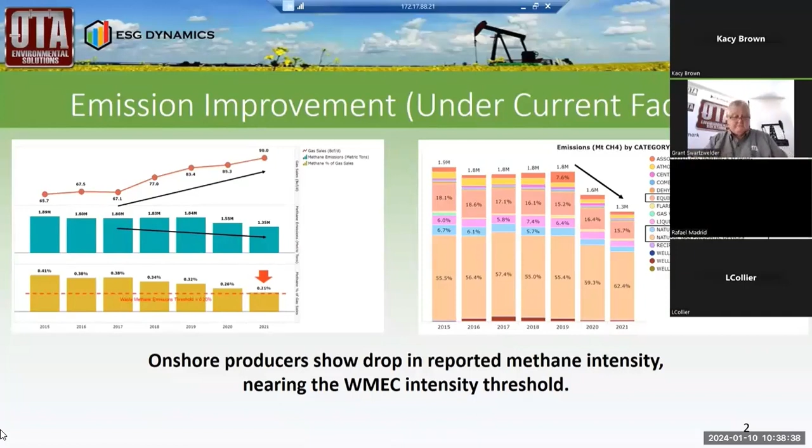So the frustrating thing is that as we're doing well, given the rules, now they're changing the rules. And the nice thing is they haven't even told everyone what the rules are. But all of this is going to increase the reporting numbers the industry has, and it's going to be significant. This is from the EIR, so it's fairly recognized data. They're talking about going up from that 2021 number by 130% with the changes they are proposing. So it's almost like moving the goal line.

What you see on the graph on the right is how 2021 is around 1.9 million. But because of each of these changes, from defining flare efficiency differently, worrying about combustion slip, leaks through factors, which is a huge part, and then super emitters, all of a sudden you see it jump up closer to 4 million, which is going to have several effects on the industry and on companies separately. On the left, you have the various factors or categories that are increasing. Super emitter is an interesting one, and we'll talk about all of these more later.

But this basically allows every proverbial Karen out there with a FLIR camera to go and identify what they believe are super emitters. There's really no rules as to what that is and who's qualified, but basically they're deputizing the world, primarily environmental advocacy groups, to go out and identify what they believe is a super emitter. That's going to increase the paperwork and the potential issues drastically.

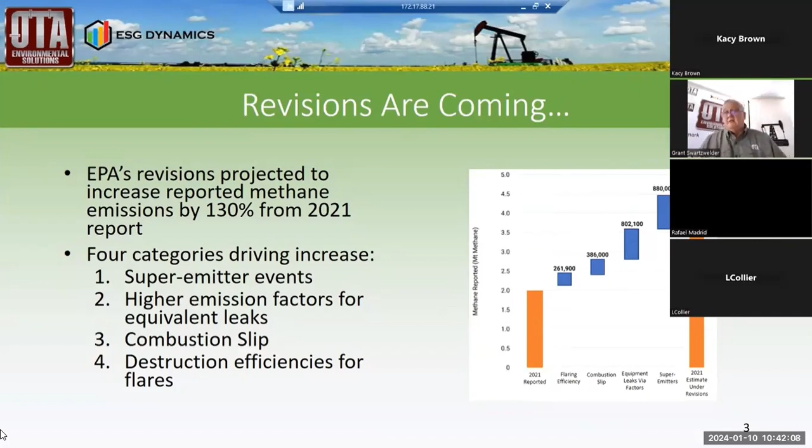And then the destruction efficiencies on flares. They've traditionally said that a flare has a 98% efficiency factor. They're talking about lowering that to 92%, which by definition creates more emissions and more challenges from a regulatory standpoint.

The whole start of this is with that subpart W, because again, if you're over that 25,000 tons, then you start kicking into a variety of factors. Right now, they've done the final rule, as you know, as of December 2nd, but there's still a lot of questions as to how that's going to really be implemented.

It's going to push it down to the states. The states come up with rules. It's come back up. So the one benefit of this whole thing is a lot of these things are not going to be really thrown at us for at least a year to 3 years. So it's kind of a question of how fast do you move, if you want to be a good steward but you don't really know what the rules are. And so if you're not careful, you're going to potentially go in the wrong direction because you won't know what the rules are.

This federal mandate under the Clean Air Act is a very sneaky thing that's been done. Up until this point, there's not been a lot of enforcement or audit compliance type capabilities, but doing it under the Clean Air Act creates the opportunity for enforcement, meaning fines, audits, penalties. And so they're really starting to put teeth into this. Again, it's not clear how all that's going to work. So I wouldn't jump out today and worry about it, but it is something that they're positioning for later on.

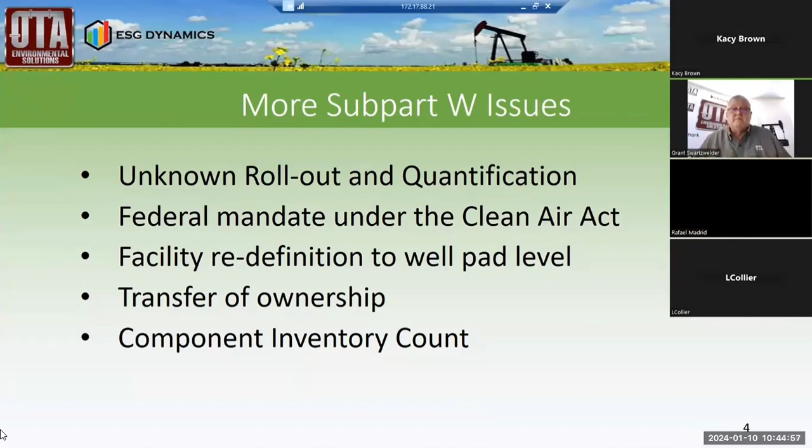So let's talk about the methane tax.

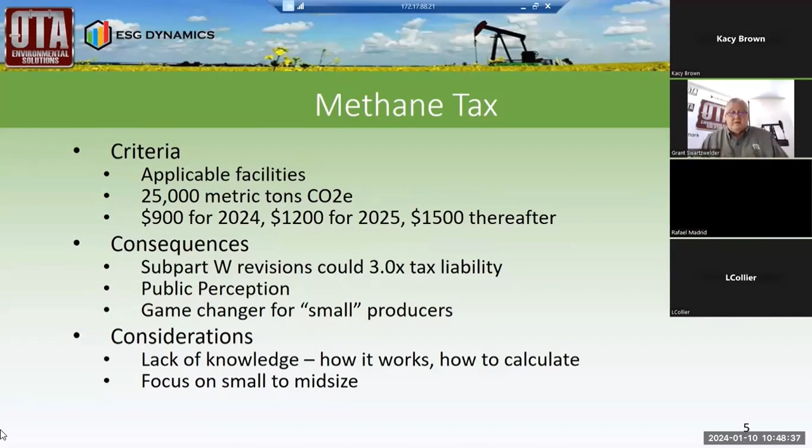So it puts the operator in a very tough position. You've got to report it, otherwise you get fined or audited. But if you report it, you have a chance of really stepping into the crosshairs of some of the emissions requirements. That is where really understanding the data that you're putting in and making sure it's accurate and defendable, but then also looking at how you can lower those numbers. That is really the key in components.

For example, we had a company we dealt with that had 5,000 components year after year after year. Well, it turned out they had never done an audit. They did an audit and reduced it to 3,000, which, as you can see, would have a huge effect on their subpart W. But that's only part of it, because once you look at those components, you have to also be able to say, do we really need them? Are they even working? As a best practice, first, you get a good inventory. Then you need to make sure that you actually are using them. If not, either put an X on them or take them out, so that if you get audited, you don't have those components to worry about to increase that numerator.

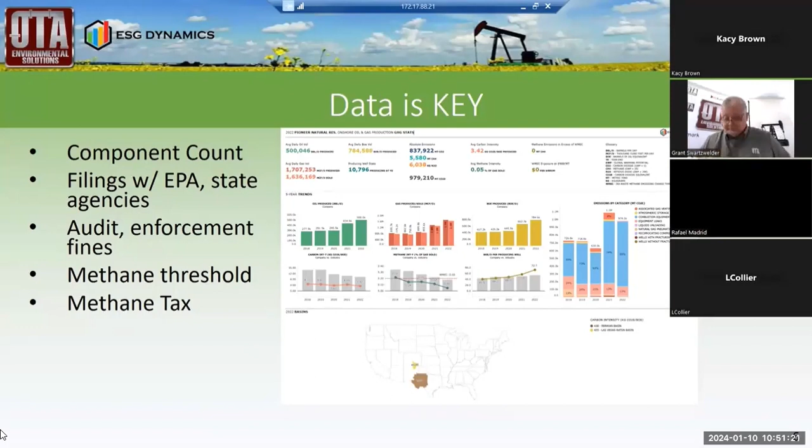So again, the bad news here is that it's really the low, marginal producers that are getting the main detriment of all of this regulation. And what they're pointing at is that 6% of the total production equals about 50% of emissions. Now, a lot of that, again, because of the numerical way they look at it, is because of the components and how they're calculating that. So I question whether that's really accurate, but that is how they calculated it.

If you're trying to change, say you're changing your pneumatic valves, actuators, and use instrument air, well, that could cost you from 10 to 30, $40,000, depending on the size of the facility. Well, depending on your production level, that might not be an economic benefit. So it really puts you in a sensitive position from a capital standpoint, from an LOE standpoint. So looking at what your priorities are on how to reduce those numbers and do it in a cost-effective method really becomes a challenge.

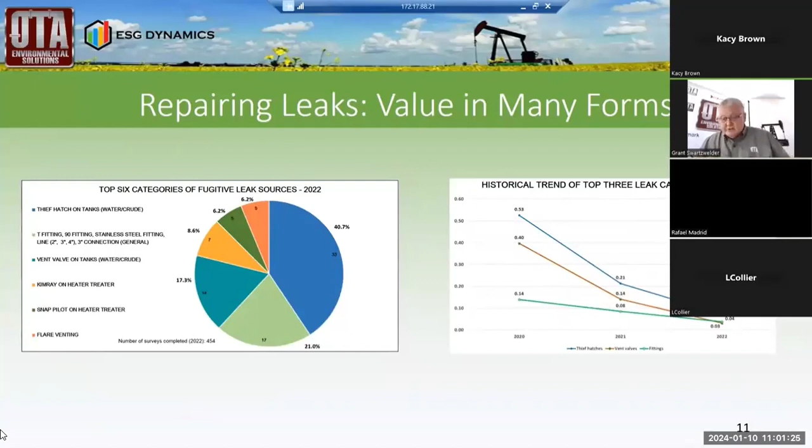The thief hatches, on the other hand, have to do with what you do from an operational standpoint. We'll talk about that. But the key point is identifying what your leaks are and then fixing them. And you see from the historical trend that this company has done a good job of that and has significantly reduced the leaks they've experienced in each of those components.

From that, what you've seen is a huge investment in instrument air. So many folks are now changing to air, which has benefits, but it's all because of the counts, the numerical aspect of the calculation. If you can eliminate all those methane-emitting components, that has a huge effect on your Subpart W.

You could argue whether it really has a huge benefit in the overall mix of methane, but from a calculation and how you're being judged, it definitely has. The problem there, though, becomes that, again, a lot of the legacy production out there has maybe not electricity, not enough economics to justify that. So looking at solar power, looking at different types of mechanical means to get rid of those pneumatics becomes an option.

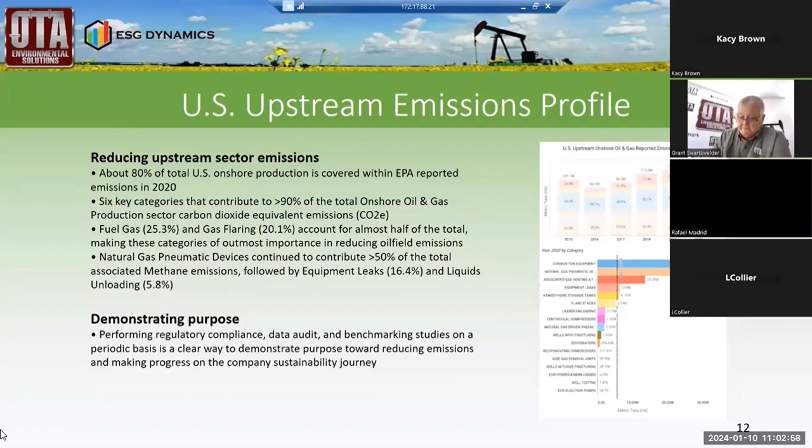So some of the best practices that we're looking at is, again, we really believe that at the end of the day, attacking the source of the emissions and really looking at where the leaks are and fixing those, and that can be achieved cheaply through spraying soap water on it to a more extensive way of using an OGI camera. But eliminating the emission is what everyone's after. And if you do that, then that takes care of all of that other reporting.

The other thing that I'd like to talk about is good facilities design. It's amazing what we see out there where the facility design itself prevents the effectiveness of the combustor, the flare, and it really makes it hard to achieve what you're wanting to achieve just because of your facilities. In fact, the problem with a lot of the legacy is the cost to change those facilities is very high. So you have to look at other options.

But if you're drilling, to really understand why you're using a 2-inch pipe versus a 6-inch pipe, the distance to the combustor that you have, there's a lot of things that are pure engineering, pure numbers on what effect it has on pressure drop and the effectiveness of your control devices.

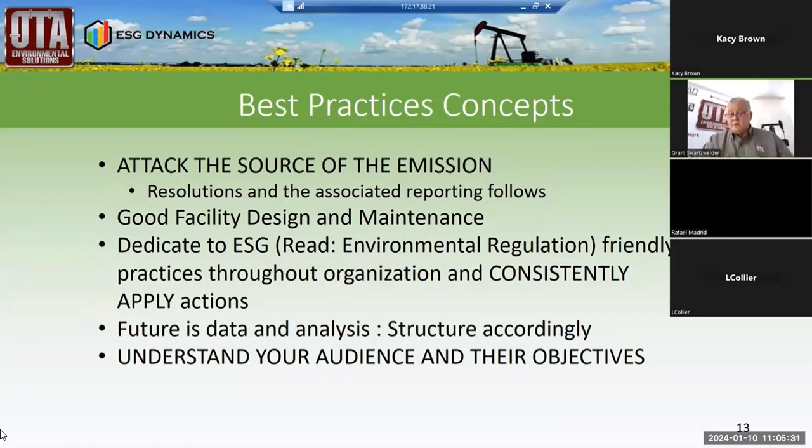Thief hatches, as we said, it's 40% plus of leaks, some say even higher. Human error is a huge part, just folks leaving it open. But there's also operational issues, gaskets, weight, springs, having them properly sized. That's not that expensive, and it can eliminate some of the easier to identify leaks, easier for the environmental advocacy groups that are driving around looking at these things.

But even that has a lot of debate. For example, gaskets. If you have H2S, things like that, that gasket part cannot be effective. So there are some folks I know out there that change the gasket out every 6 months to be proactive. Now, the flip of that, to change your gasket, you have to open the hatch and you let all that emissions out. So damned if you do, damned if you don't. Kind of pick which one. You have to decide what's best for you and how to best handle that.

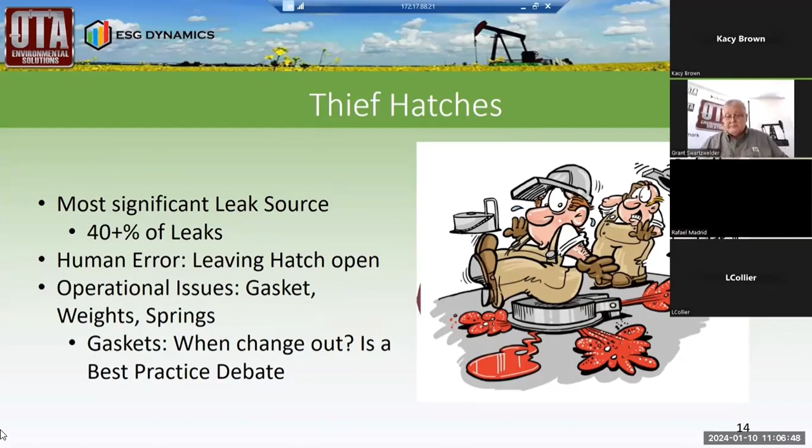Flares, those are the easy targets because they're tall. You can't miss these pictures. And so what we see is that there's really not as much emissions on this as there are others. Partly that's the calculation for EPA, and partly because most folks can figure out what they need to do on their flares to fix those.

We are starting to see folks worrying about slip. So that's when you have an air blower, the difference between these two pictures. The one without the smoke has air on it, turned up, and that allows it to burn cleaner.

Now, what they're worried about is as air goes and blows through there, they're saying that some of the methane is not burned completely. However, we're actually in a situation with a customer right now. They can't document it, but they have some of these continuous monitoring that are saying that it is an issue, but they can't really tell for sure what it is. Is it just exhaust, or is it really methane?

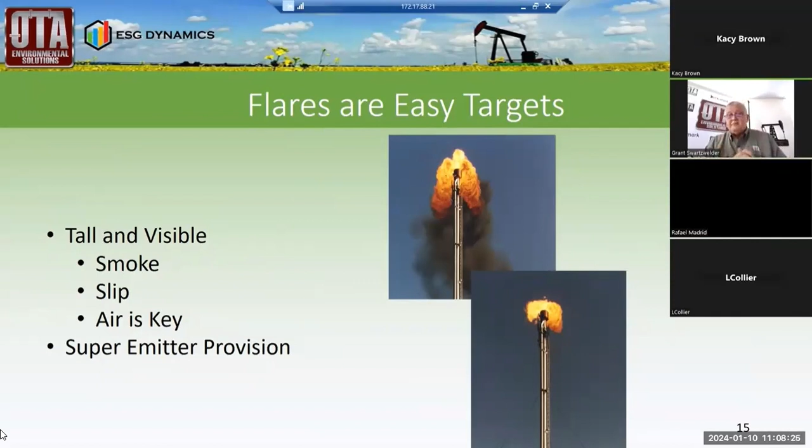And this also fits into the point I talked about the super emitters, where all the Karens out there with cameras can start identifying those and saying you've got an issue, and then that's what could potentially create an issue that you're going to have to respond to and go out and deal with and document.

So determining how to size these is hard because you can't really tell how much emissions is coming off of a tank. We do a direct measurement where we do a 24-hour test to see what the vapor is. But you've got to understand, with multiple wells coming in there, if they're on timing systems that open and close at different times, it becomes a complex puzzle if you're not careful.

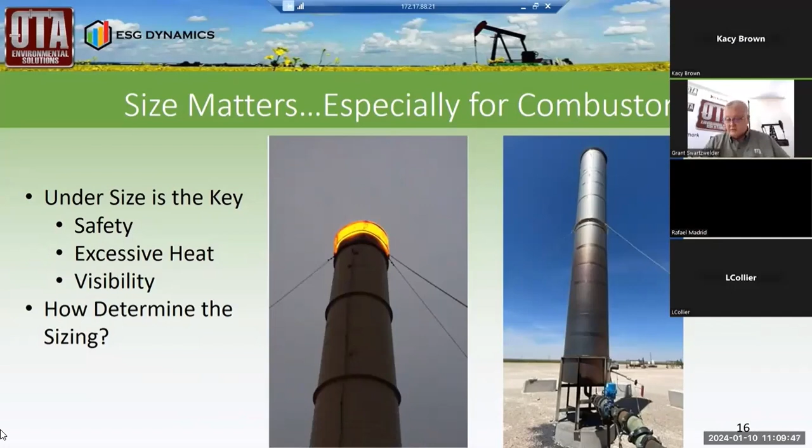The other thing that we really push is the need to just do good maintenance. For example, on flares and combustors, really making sure that your pilots are working, that your igniters are working, because if they're not, then you're usually just venting or you're venting ineffectively. And the other big deal is having a plan for your scrubbers. This is not meant to burn liquids. You're supposed to have a scrubber before it so that the liquids are taken out, because the last thing you need is a flare spitting out liquids that are on fire. That's going to be a bigger issue than you ever want.

But a lot of scrubbers are manual dump. You got to make sure that your pumper is always dumping that, because if it gets too full and that carries over, you're going to have a bigger issue than you really want to deal with.

The other thing, from a best practice standpoint, if you're ever going to work on a flare, you've got to be able to isolate it. You got to be able to turn a valve so that you can get in there. Because the last thing you need is someone to work underneath that flare and then it goes off. Very unsafe. And we have a lot of issues getting preventative maintenance done because we can't isolate that. So when you're doing a facility addition or changing, make sure that you have isolation valves so that you can do the proper cleaning on this.

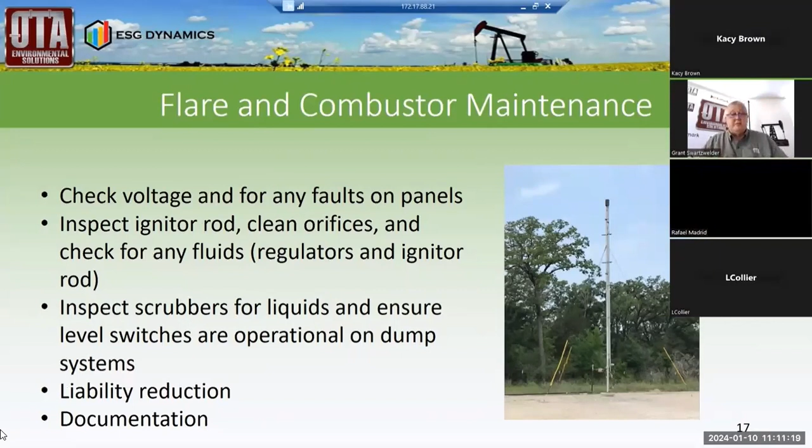Another white paper we did is talking about pressure drop. And as we all know, pressure is your friend. It allows you to get things done a lot easier. We did a study, and again, this white paper is on our website if you want to look at it, but it looks at 4-ounce, 10-ounce, and 16-ounce tanks. Then it looks at various gas rates, and it looks at the size of the pipe. Those are your big three.

Combustion can work, but it's not going to be as effective as if you have higher pressure and are able to enter that control device at a higher pressure. So looking at what you start with in tanks, obviously if you have a 16-ounce tank and that additional pressure, the distance and the rate become so minor because you're starting at a higher pressure.

But at the lower pressure, having 2-inch lines, and a lot of these are old lines, so it's 2-inch OD, but that ID has shrunk because of buildup. So you're probably trying to push gas through a 1-inch space, which makes it even less pressure. So that's where, when we talk about facility design, it's so important, because it gives you a chance of really making things work well.

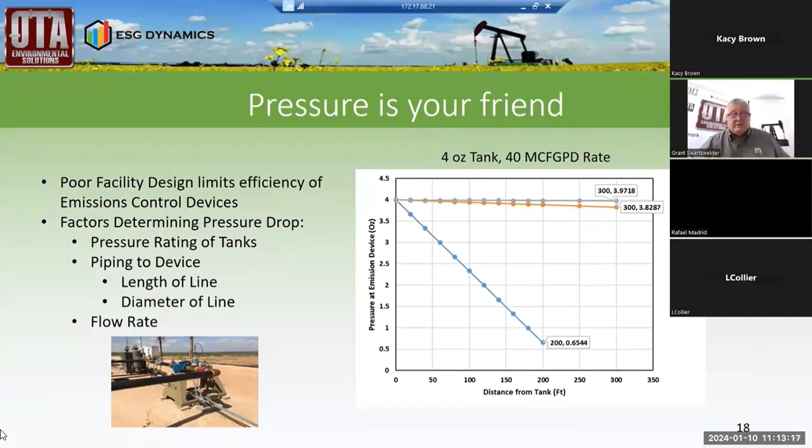One of the other factors, probably the fourth factor on that whole pressure drop, is flame arresters. And it's, again, kind of an unspoken issue out there. I think you all know that you have flame arresters there so that they allow the gas to go from your tank or your separator into the flare or the combustor. And then if you have a fire, it stops it and doesn't allow it to go back to the tanks and become a more catastrophic situation.

The problem with this is that there are so many flame arresters that no one's ever cleaned. Why don't they clean them? A, they don't think about it. And B, because it's very expensive. Because to clean those, you typically have to shut down your facility so that you can get in there safely, open it up, clean it out, and replace it. And you've usually got to have a roustabout crew do that. So there's cost implied and realized through that whole thing.

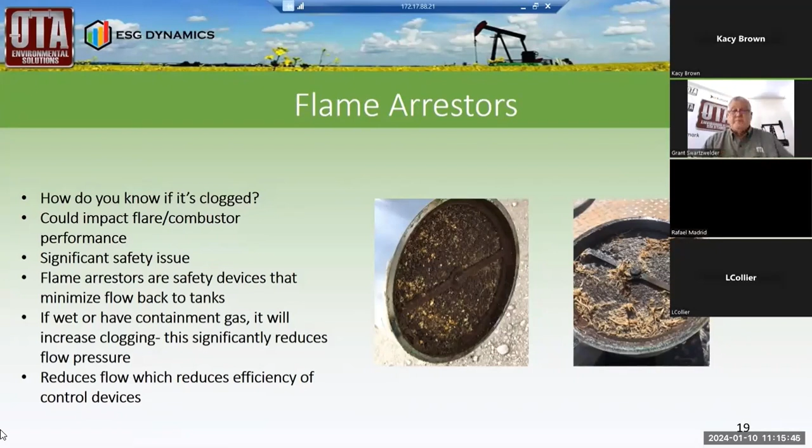I think I hit my 45 minutes almost right on time, which is always amazing. But this is just an example of some of what we provide.